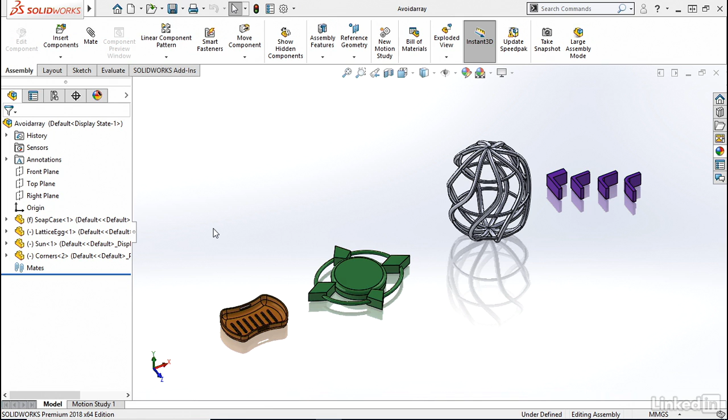I've noticed some common pitfalls that beginners fall into, so let's talk about what some of those common pitfalls are and how to avoid them with some best practice examples. Pitfall number 1, insufficient or negative draft. I'll open up this first part separately so that we can see it better.

It's a bit mind-bendy at first, but think about this for a minute. If the direction your mold comes apart in is straight up and down, and your part doesn't have enough draft, it won't demold properly, and you might end up with some unusable parts. Negative draft is almost impossible to remove with a hard mold. If your plastic hardens and you start trying to pull it out, what do you think will happen?

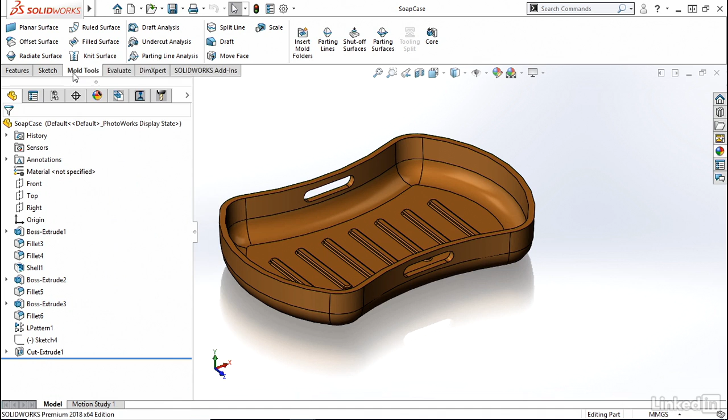Watch out. There's a handy tool in SOLIDWORKS that will help me visualize this. It's found here under the Mold Tools tab. If you don't see it, right-click, and you can select it to make it visible. The tool I'm going to use is the Draft Analysis tool. I can usually tell by looking, but this tool can help you really zoom in on those problem areas.

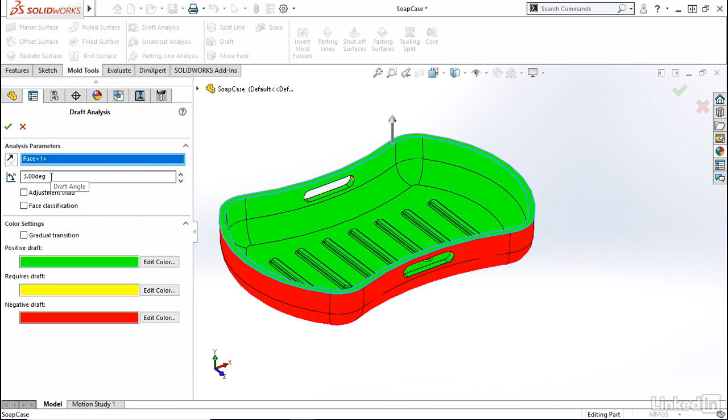If your part design requires some negative draft or undercut, your mold will require additional moving parts to your design. I select the parting surface here, and it shows me that my part has 3 degrees of draft. Green is good, yellow needs some work, and red won't work.

So if we look here with this undercut, this will call for a separate part of your mold called a pull, so that this whole part can come out correctly. The addition of pulls and other moving parts in your mold definitely add costs, so be mindful of that.

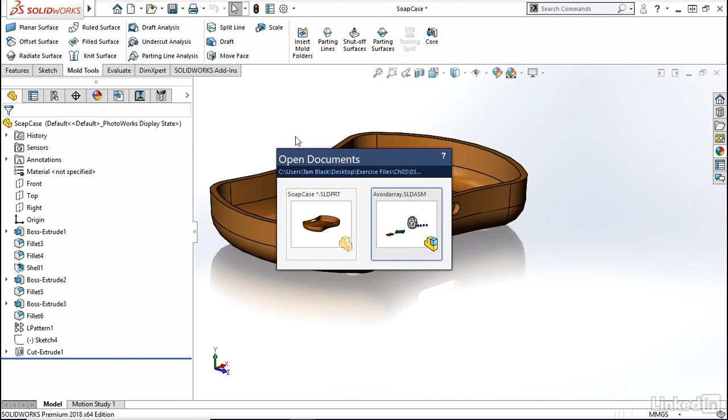Another pitfall to avoid would be long, spindly things and major discrepancies in part thickness, as shown in this sculptural object. Material takes less time to cool the thinner it is, and parts thicker than the recommended maximum start to warp in shape. You can mitigate this with tapering between parts, but you should pay special attention to your manufacturer's guidelines on what's actually possible.

Let's say we wanted to mold this sculpture. Thin, spindly features tend to stick in the mold. If you have spindles, try to design them along the parting plane so you have a chance of getting them out. Different thicknesses of parts solidify at different rates, which can make your part shrink at different rates and deform your parts, often outside of tolerance.

Also, the longer it takes for a part to be made, the more expensive it is per part. These are some of the reasons why well-designed parts have a nominal wall thickness that is consistent throughout the entire part.

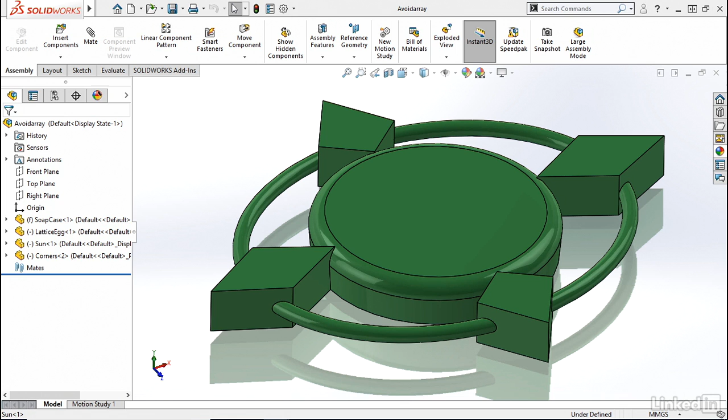The third design pitfall that I want to call out are lattice vessels, like this one. I've had quite a few people ask me how to mold something like this, and I have to explain why this is extremely complex to mold and manufacture. 3D printing helps us create some really cool geometries without the considerations required for mass production. Keeping a design manifold with sufficient draft, fillets, and flow considerations is hard enough without your design being full of holes.

I could quite possibly mold this lattice vessel in 2 pieces and assemble it later, but the draft would get very complex. If the design requires this to be a single part, the interior volume makes this a destructive molding part by nature. Of the manufacturing techniques we've covered, what do you think would be the best way to make something like this?

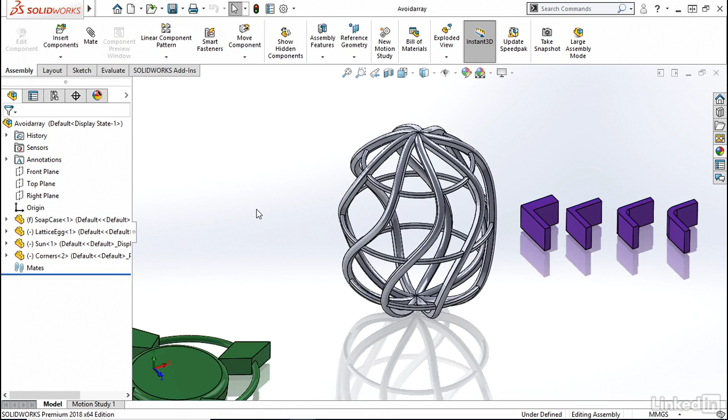The last novice design pitfall I'll cover are improper wall transitions. At first, this looks fine, but on closer inspection, the 2 walls are different thicknesses, and where they meet is incorrect. Maintaining a nominal wall thickness applies to where parts of your model meet up in every direction. If you have 2 same thickness walls meeting up at a 90-degree angle, the hypotenuse right here is too thick. Your corners are going to warp.

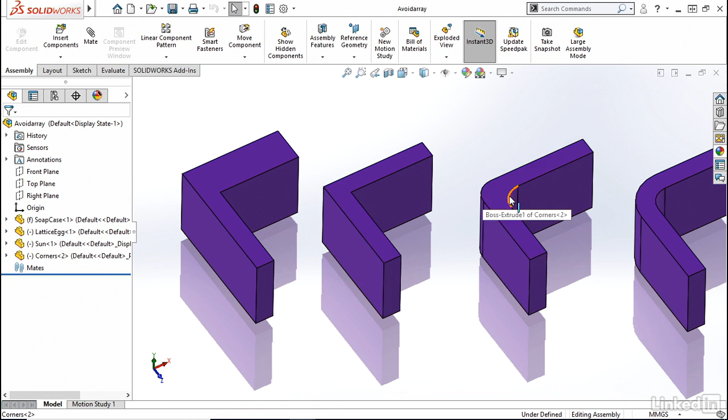If you have 2 same thickness walls meet up, but your rounded corner has the same radius applied to both interior and exterior, you can see it does get thicker in that corner. I tend to address this on the sketch level, where I describe the inner wall required, apply the radius, and then offset that line. That way, I can control where the interior wall goes.

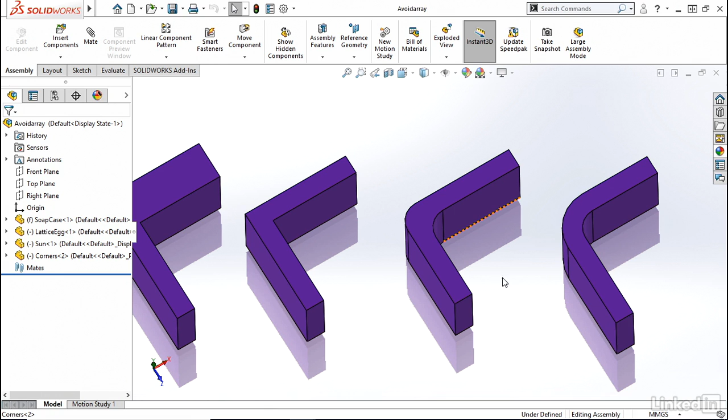I also really like the shell command. It's really helpful for a lot of starter projects to help solve the thickness variation issue. At its core, you need to pay careful attention to the way liquid flows throughout your mold, as well as what level of difficulty there will be in ejecting your part once it's solid. Practice makes the master, and prototypes are a lot cheaper to experiment, so go have fun.